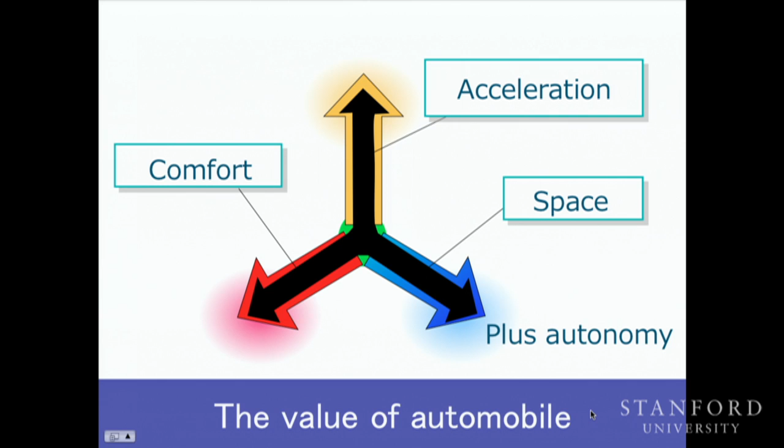I have been working for 35 years on how to increase these values in electric vehicles. Fortunately, several important technologies were invented within these 35 years.

One is the lithium-ion battery. It was invented in 1986, and after 2000, large-scale lithium-ion batteries were developed to be used for electric vehicles.

Second, the neodymium iron boron magnet was invented in 1982, and after the 1990s it was commercialized, but at that time it was too expensive. After the year 2000 it became much cheaper, which is why neodymium iron boron magnets began being used in high-efficiency refrigerators and air conditioners.

Also, very high-efficiency inverters such as IGBT were invented. By using these inventions, the performance of electric vehicles can become much better.

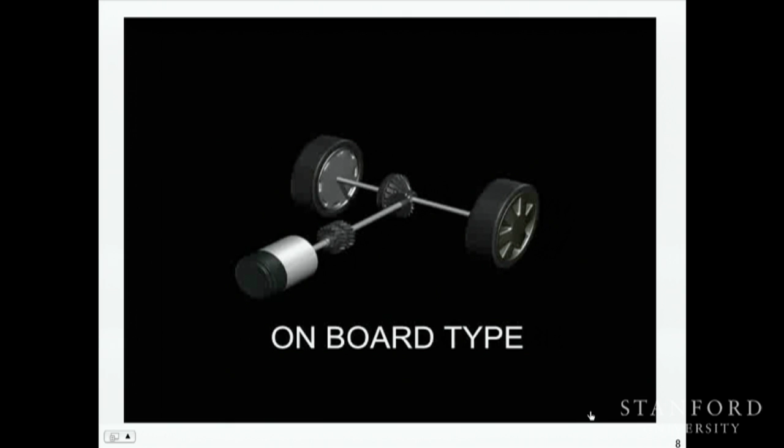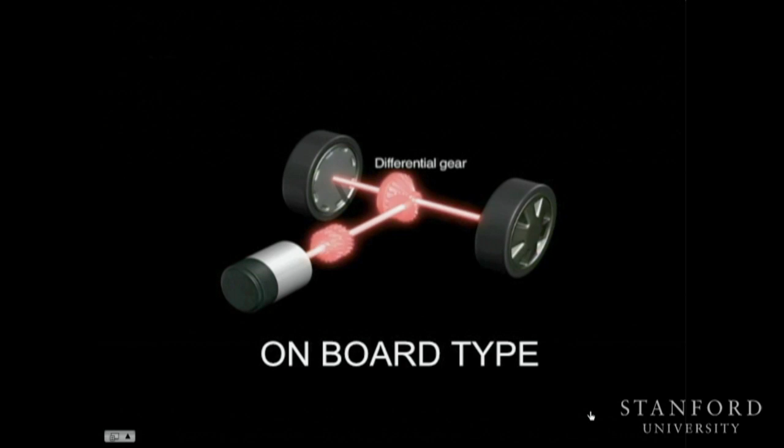This is the conventional onboard-type motor. Transmission, reduction gear, and differential gear were used for conventional electric vehicles. But in our case, motors are set inside each wheel.

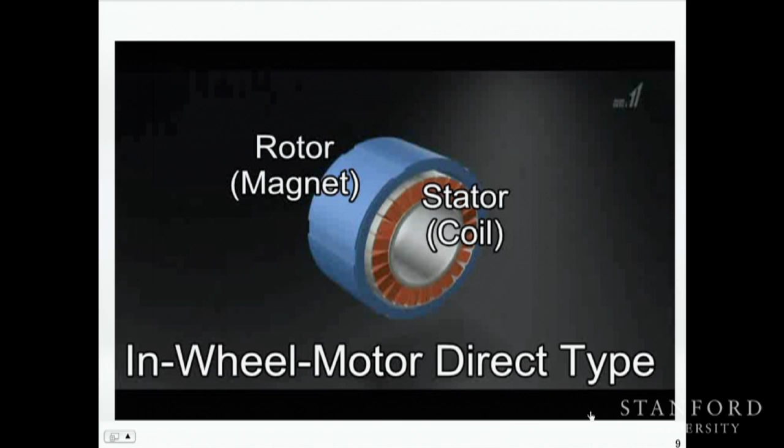In our design, the stator is inside and the rotor is outside, because to increase the torque of the motor this shape is very effective. The rotor itself is connected directly to the wheel, like this.

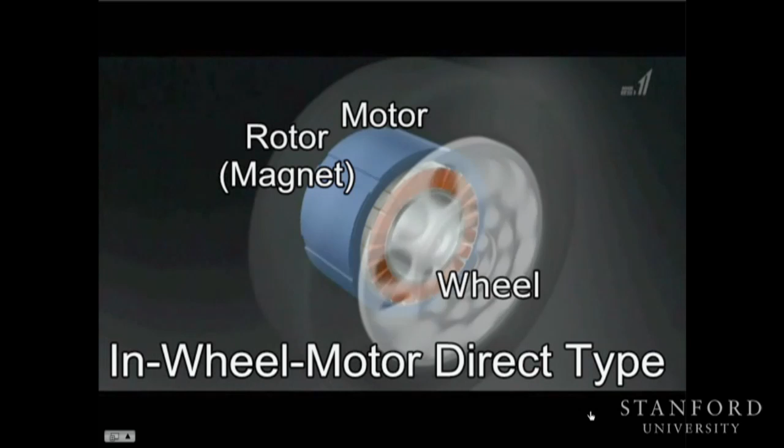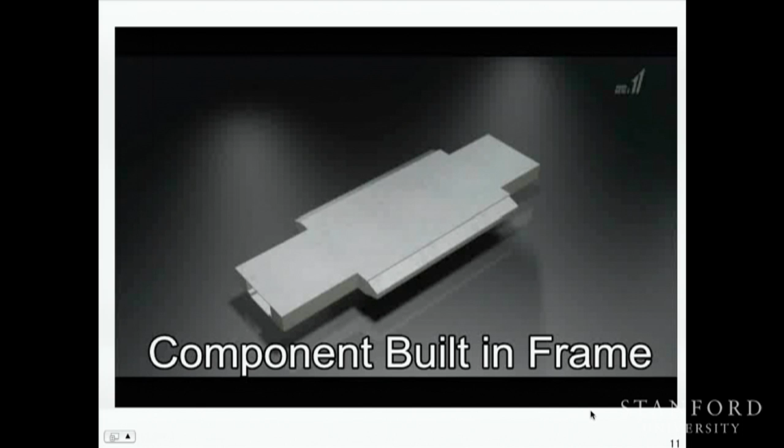And the other point is the component built-in frame. In this case, as I said, all the batteries are set inside the floor, and other components are set on the side, and any kind of body can be put on top.

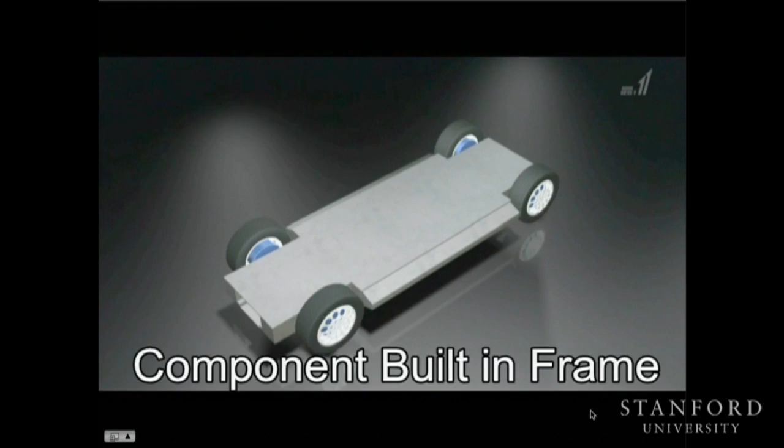By using this technology, I have been making 14 electric vehicles. At the beginning we made the conversion type, then went to motorcycles, and after that 4-wheel or sometimes 8-wheel, 8-drive vehicles. The most famous car is Elica, which was made in 2004.

This is Elica. You can see the picture when it was test driven. I expected the maximum velocity to be 400 km per hour, but there's no sound of an engine.

This is an electric car, propelled by motors and batteries. With 8 wheels and more than 600 horsepower, it's a genuine supercar. But unfortunately, the maximum speed was 370.

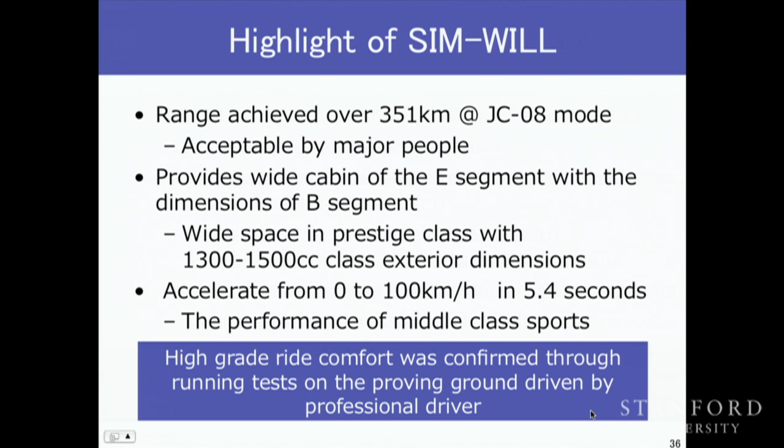So what we are doing is figuring out how to spread the technology of electric vehicles. That's why our method is open source. Everybody can join our project, everybody can get our technology, and everybody can use our technology for themselves. So even car companies can catch up to our technology very easily.

In the case of Japanese car companies, they can do everything by themselves, as well as us. But to reach our level, they must pay a lot of money and spend a long time. If they join us, in just one year they can get all of our technology. It's a very easy way to catch up. That's why I'm asking many car companies, but they always say, we can do everything by ourselves. That is a problem.

The merits to join our project still remain. One is that technology can be given very easily with cheap money. The second point is new information can be given because we are spreading all kinds of information on electric vehicles. So this position is very useful to gather new information on electric vehicles, and the participants can get all kinds of new information.

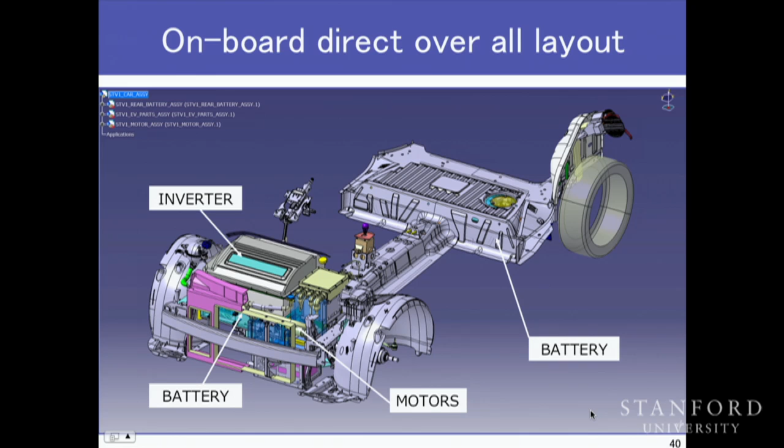We are also making some conversions of electric vehicles. For example, we used the Citroen DS3 to convert to an electric vehicle. In this case, two motors are set on the body, one around here and one around here. Batteries are located here and here, and this is the inverter. In such a way, and by using our direct drive motor, conversion can also be done.

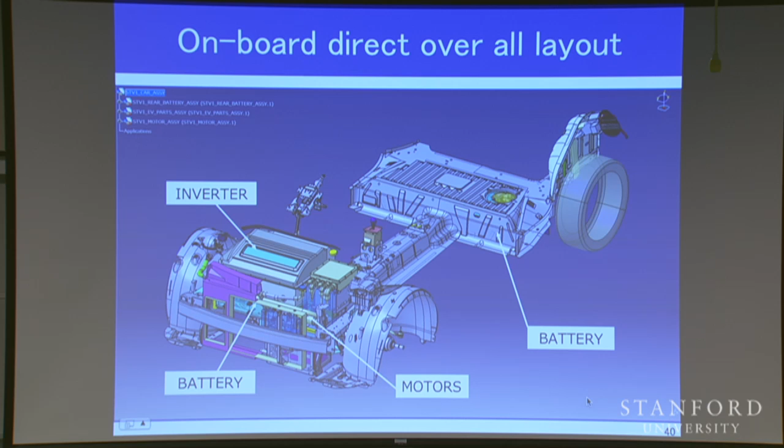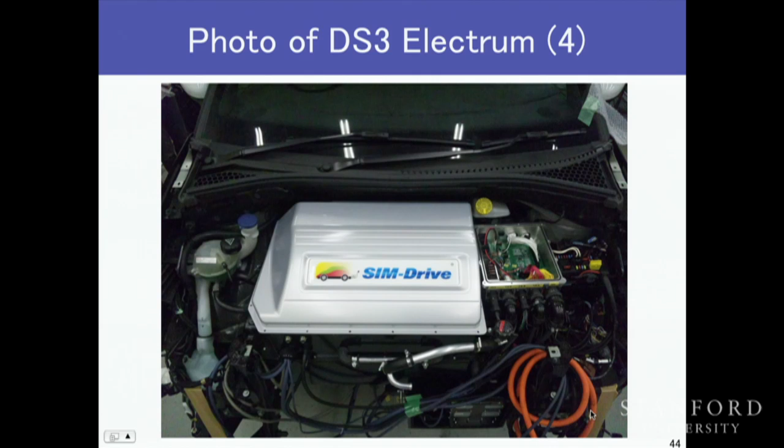So finally, I want to talk about standardization a little bit. Why do we need standardization? It's for safety, easy use of the car, and ease of manufacturing. From this point, we must consider standardization of electric vehicles. About safety, the most important thing is high voltage, both in case of an accident and during maintenance. Crash safety should be better than internal combustion engine vehicles, and electric vehicles are sometimes said to be too quiet, so we must consider these points.

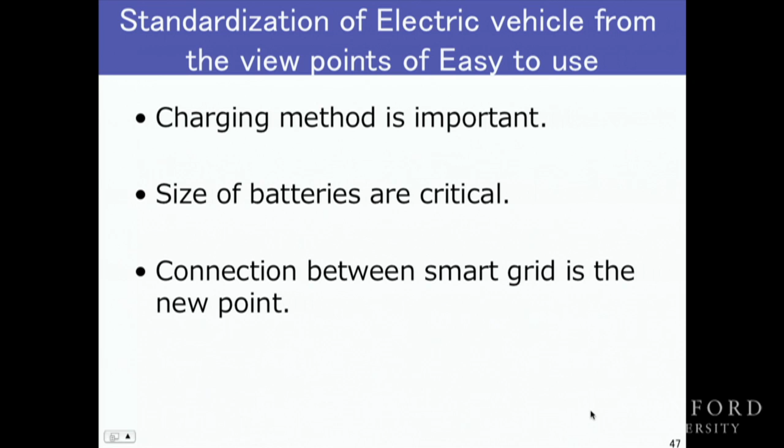The other point is ease of use. One point is that the charging method is important. Also, the size of batteries is critical, and connection with the smart grid is also a new point.

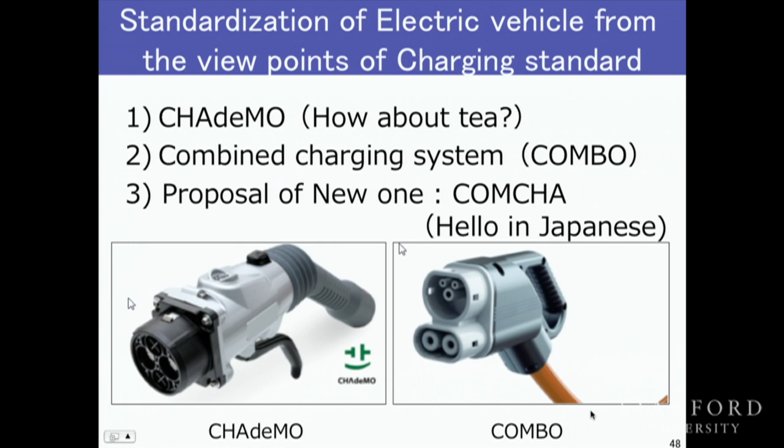Now there are two standards of charging method. One is CHAdeMO, invented in Japan. This year, the new method Combo came. Both are not so different. CHAdeMO is mainly used in Japan, and Tesla Motors uses this system, as does PSA Peugeot Citroen. General Motors, Ford, and German big OEMs are going to use Combo.

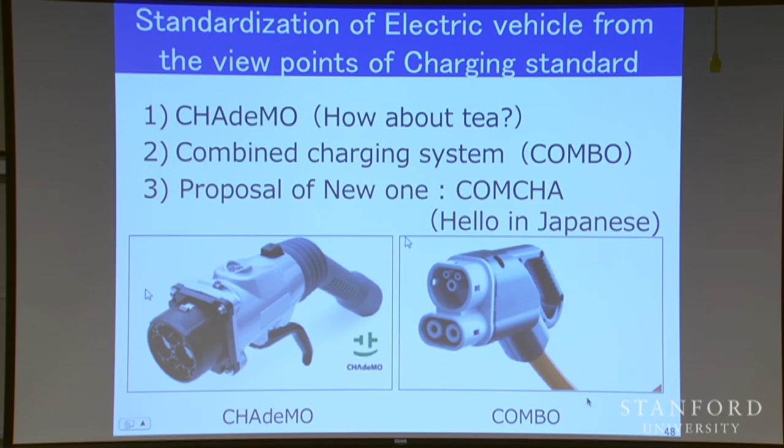If there are two standards, it is very uneasy for users, so we must consider how to combine these systems. CHAdeMO, how about tea in Japanese? The combined charging system is named Combo. So we must combine them together: COMCHA. COMCHA, konnichiwa is Japanese for hello. So I hope this kind of standardization is important.

And from the viewpoint of manufacturing, local area network, high voltage system, and low voltage system are important. So we must consider such standardization also to spread electric vehicles.

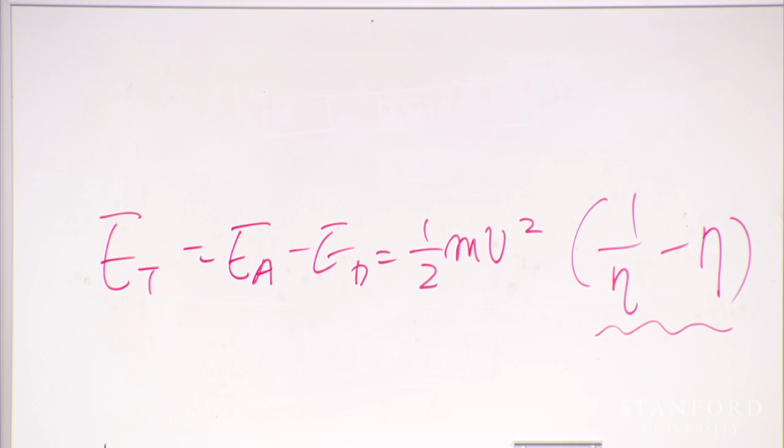The energy is... so acceleration and deceleration total energy is efficiency. This point is very, very important. If you use one gear, efficiency at low speed and high speed, low torque and high torque, the average efficiency is 90%. Gear efficiency. Our motor efficiency is around 80%.

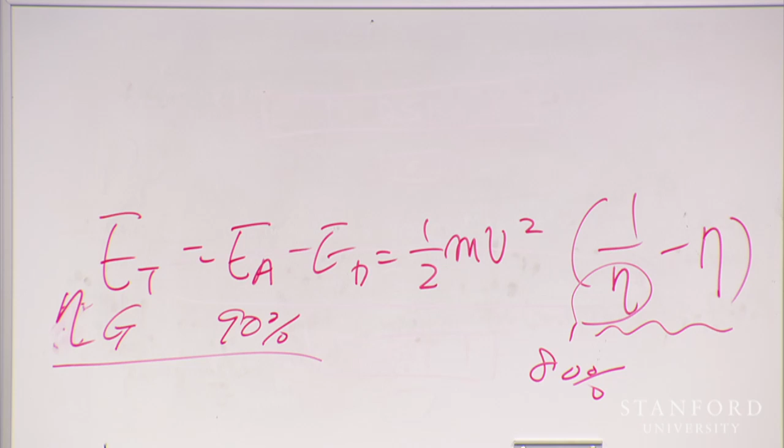So if you put 80%, if you use a gear whose efficiency is 90%, 0.8 will become 0.7.

So it is clear that if you put a 10% loss gear, energy for acceleration and deceleration is 0.4 and 0.6. So 1.5 times difference. Just by putting one gear, the energy consumption rate for acceleration and deceleration has a 50% difference. That's why we must remove the gear between motor and wheels.

So it's a very easy calculation you can understand. But by talking, it is very difficult. It is a point. Regenerative brake is very important in electric vehicles. Okay. Thank you. Go ahead.

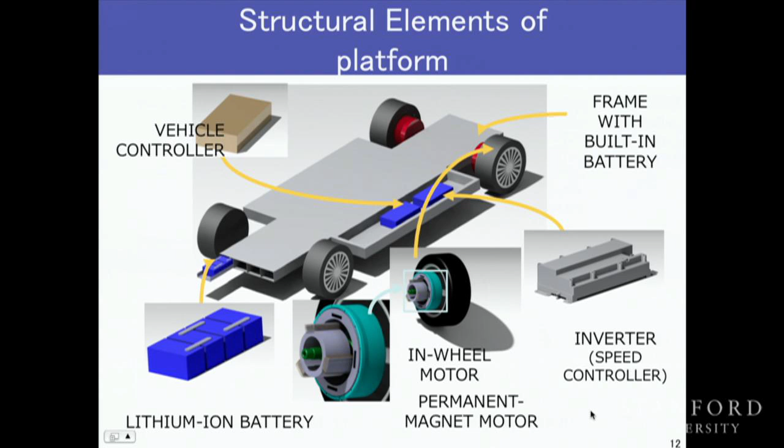Oh, okay. One of the primary benefits of the in-wheel motor system, it sounded like, was how separate the chassis was from the rest of the body, that you could easily put on a different type of body. Have you looked at all at retrofitting cheap cars that already have internal combustion engines? Sorry, to retrofit cars that have ICE? Yeah. Retrofit is also possible.

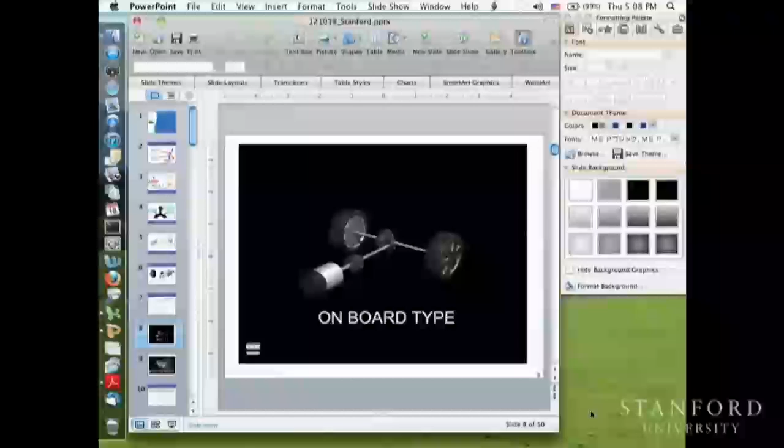Yeah, retrofit is also possible by using the old traditional body. It's possible. Do you have an estimate for how much that would cost in production quantities? At this stage, the motor itself is too expensive because it is not mass produced. But after 100,000 cars, the price of the motor will become dramatically low. At that time, retrofit is reasonable. But at this stage, the motor itself is very expensive because of no mass production.

Do you know if anyone is thinking seriously about starting a business around retrofitting automobiles? Yeah. Very many persons are considering it. But actually, the cost is not easy because component cost is still expensive. So after mass production of electric vehicles, retrofit will be more reasonable, because the lithium-ion battery is still very expensive. Okay, thank you. Back in the back.

I read the book about the intelligent wheel proposed by Michelin, which integrates suspension, motor control, and wheel motor. Do you have any comment on that? Yeah. Most people from the car industry say, if you use an in-wheel motor, unsprung mass is the problem. Unsprung mass, do you know? Unsprung mass is the weight between the spring and the ground. It means the weight of tire, wheel, brake system.

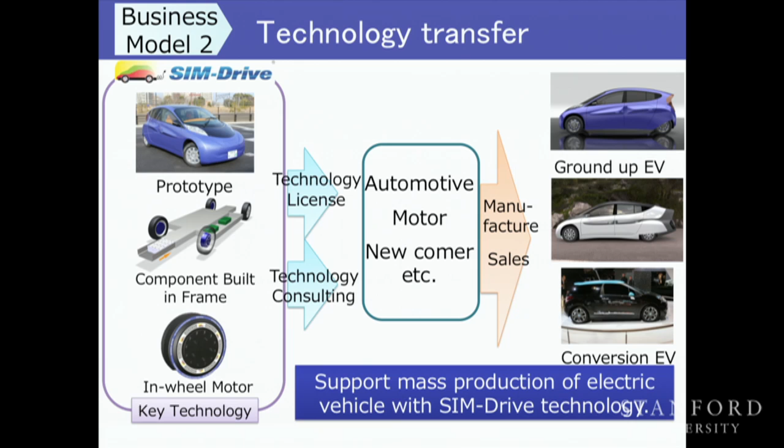Our first business model, I talked about in detail, this one. In this case, $0.2 million is paid. But if some company wants to make their own car by using our technology, I can transfer the technology, all the technology. At that time, I can get a very small transfer fee, and when it is sold, some royalty. I will ask some royalty, but if they don't mind to pay, it's okay.

It's just the discussion. But in the normal case, by one year, almost everything can be understood. But it is very difficult to make it by themselves because some professional technology is required. At that time, they must ask us to do the real things. For this purpose, we can get some money for consultation, and all the drawings will be given, and much support will be given. After that, the real car will come to the market.

So I think if there are no further questions, I have one brief suggestion. In a few years, maybe we'll see cars that don't say Intel inside, they say SIM-Drive inside. And that would be a great thing to see.